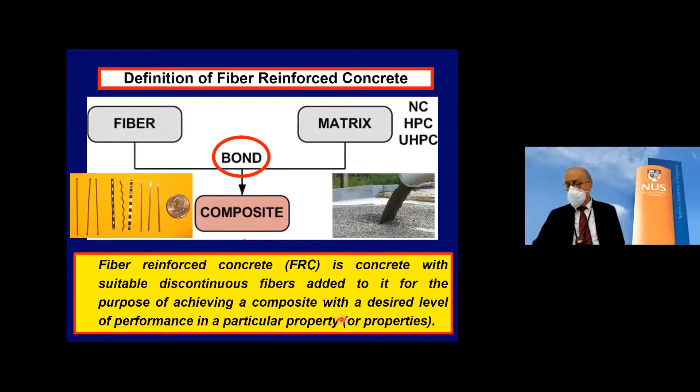So now, essentially, we have the matrix, we have the fiber, the bond between them, the composite. And of course we want to put a fiber for the purpose of achieving a property of interest, for example impact, shear resistance, and so on.

If you are in a civil engineering background looking at courses in concrete structures, we in general look at reinforcement, and today steel and FRP, fiber reinforced polymer reinforcement, are included. The cementitious matrix, the bond between them, the composite.

At this point, you have two paths. One is you go continuous reinforcement - that's reinforced concrete, pre-stressed concrete, partially pre-stressed concrete, textile reinforced concrete, etc. In fact, it started in 1855. The first patent on reinforced concrete is on ferrocement, and it will come up in our discussion.

And then you get all the applications with all these wonderful structural materials. Some of them are standalone, some of them are in combination with others.

We go back to this path where, from a mechanics viewpoint, you would expect that effectively discontinuous fibers are going to be different. They started with a patent in 1874. There was a dormant period, which I'll explain a little bit during the presentation.

Then we started working more scientifically on the subject around 1960. And today we can say that fiber reinforced concrete has some small standalone structural applications, but certainly it could have a lot of applications in combination with other materials.

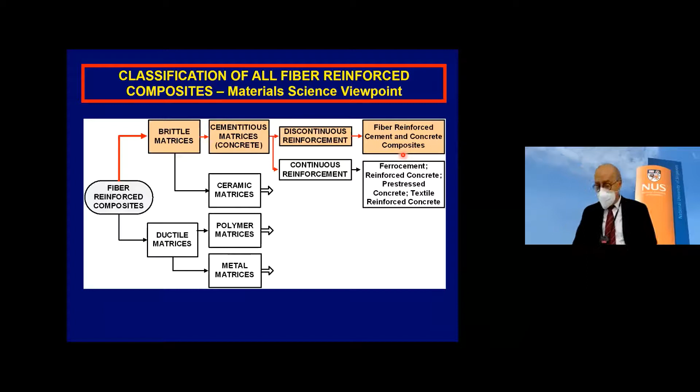So in both cases we are looking at the same material, but whether you go material science or civil engineering, sometimes it seems to fit differently. Same material. So we go back to the outline.

I'll talk about some historical background, and I'm going to identify two periods in the life of fiber reinforced concrete. One I call a dormant period, and I'll try to explain it. The other I call a scientific period, which started in 1963, so when I say five decades of progress, it kind of starts at that point.

I'll talk quickly about development of fibers and matrices, but I want to point out two key milestones: one related to what we call today strain hardening FRC composite, and the other ultra-high performance concrete, or ultra-high performance fiber reinforced concrete. In fact, almost half the lecture will end up with ultra-high performance concrete. Then I'll talk about some applications with UHPC and conclusion, hopefully in time.

Now, starting with some history, you have heard, or I'm sure you have seen, what we call adobe houses or adobe structures made out of mud, clay, and straw. I'm going to show you a picture of a typical village still today where these houses are built of this adobe, and you would wonder why they have put the straw in the mud, in the clay mud.

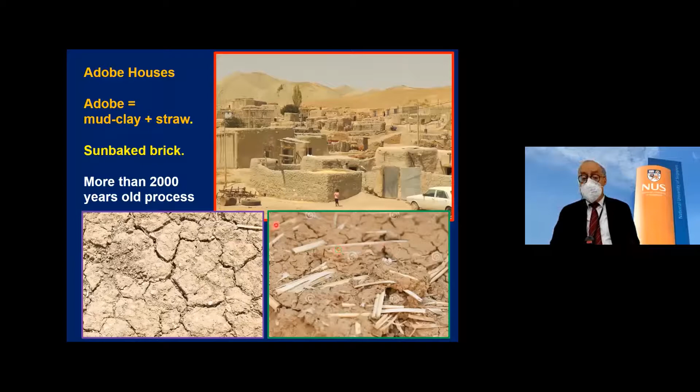So what happened is that the straw is keeping the material from fragmenting or keeping the cracks from opening, because remember, the material is subjected to temperature and environmental conditions—it could be snow, rain and heat. And what seemed to be a great advantage of the straw is that it keeps the material from fragmenting, making it a better material for this construction purpose.

I go back to the fibers in construction material history. We know asbestos fibers were used in ceramics found in Scandinavia, and the assumption—we don't know what ancient people actually thought—was that the fibers stabilized the ceramic when heated to form its final shape. We also know that horsehair was used in mud to produce some bricks-like material.

Cow manure with straw has also been used. So this is the background in terms of materials other than concrete and steel.

The first patent of steel fiber in concrete was taken in the 19th century by a man named Berard from California, surprisingly. What Berard had in mind was to use steel shavings, waste from steel mills, in concrete, and he used concrete blocks. The idea was to strengthen the concrete blocks, and this issue of strength is important.

So let me look at history now, starting with this patent of Berard, 1874. This is my time axis—it's going to span until today.

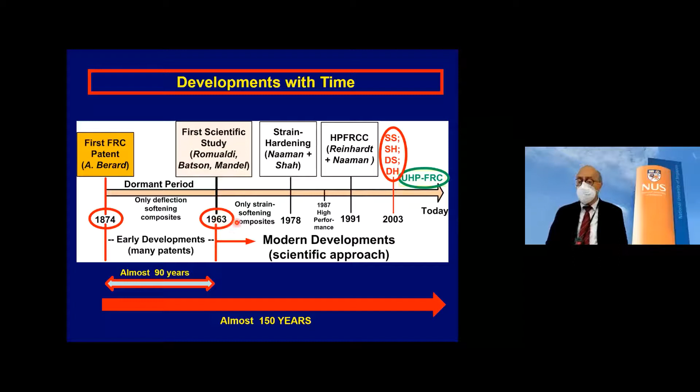Now, along here, I'm going to address one milestone: strain hardening, strain softening material. You may know what it is, but you'll see the background of it. And then I will talk about UHPC, UHP-FRC.

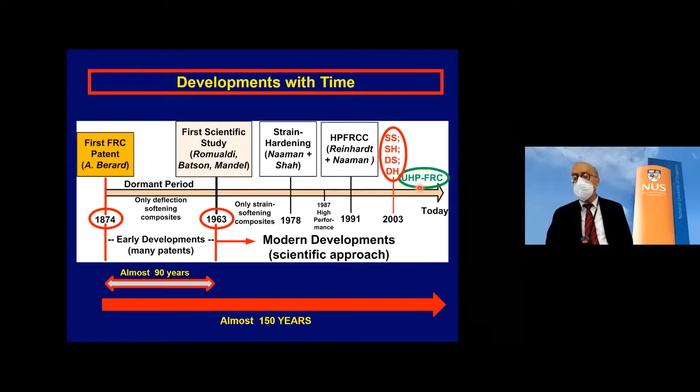It seemed to start around 2003, though it actually started a little earlier, and I'll explain that. All right, so now let's look at that period I call the Dormant Period. It went from the first patent, 1874, to 1963.

I want to show you some patents developed and submitted by many people. This one, for instance, is ferroconcrete construction—they use flat steel fibers, basically cut in short pieces, to strengthen corbels. Even today, if you gave me a fiber like that, I'd say yes, it will do a good function.

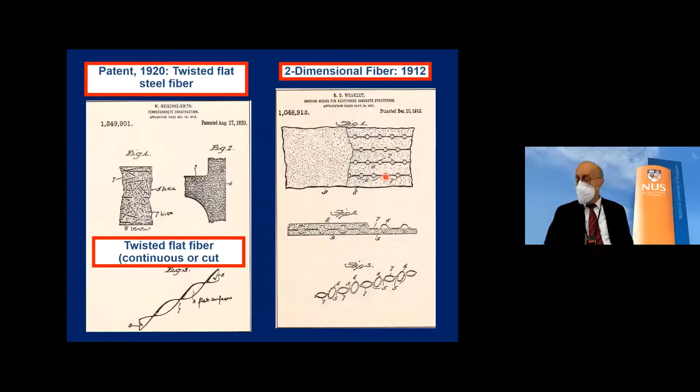In this patent from 1912, the main suggestion was that you needed to create better bond between the reinforcement and the matrix, and these annuli created that bond—the same ideas we have today about how to improve the anchorage of fibers.

I like these two patents very much. 1927, this is a method of producing a pipe. In fact, pipes and poles are a good application for fiber reinforced concrete. Mr. Martin suggested fibers of different lengths, and then crimped fiber.

We know crimped fiber today gives you certainly better bond because of the mechanical anchorage. But this patent could be done today—again, it's called a method of forming a pipe.

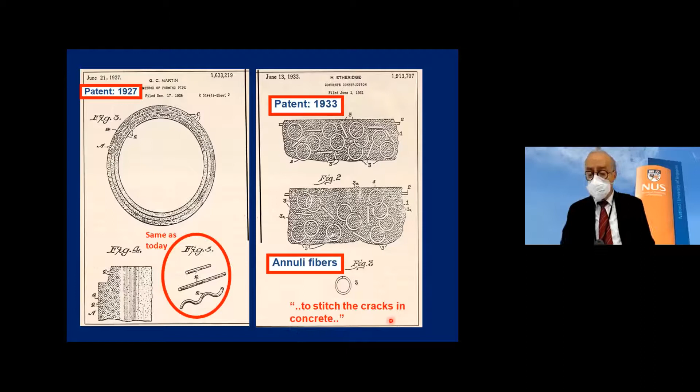In 1933 we have a patent by Etheridge, and I like very much what Etheridge wrote—he wanted to use the fibers to stitch the cracks in concrete. So a crack is going to form, and he wants to stitch the crack, which is again what we try to do today. But I'll explain why they were not successful.

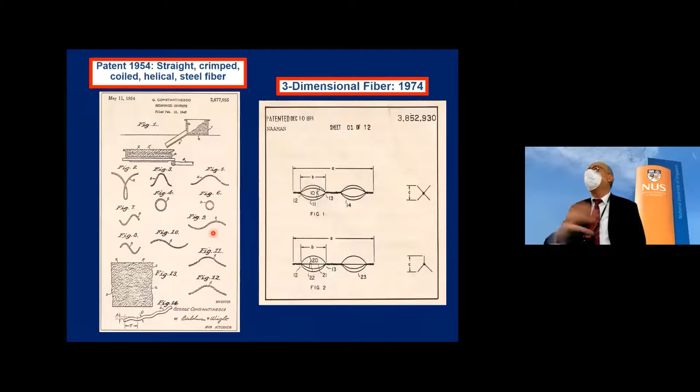Now I have two more patents I'll just show here. One by Mr. Constantinesco—he almost took every single patent that happened before him and claimed it, with the difference that instead of having a straight fiber, he coiled it. So this is a new idea: you coil, you have a third dimension, if you want. I think what he did could be also valid today.

And then you wonder why we haven't heard of him. At some point, I was working as a student at MIT, and we needed to create an anchorage for fibers—it's a long story—and I developed this, almost like a football fiber.

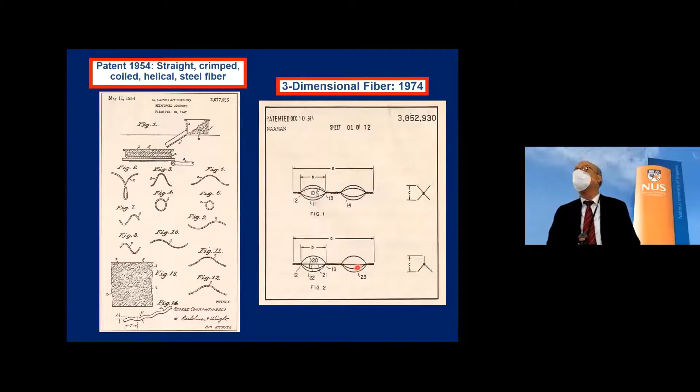Where if you have a crack, most of the time there will be sufficient aggregate. Imagine you go in the middle, and this will anchor on both sides of the crack. This hasn't been used much, but it's there, as I mentioned.

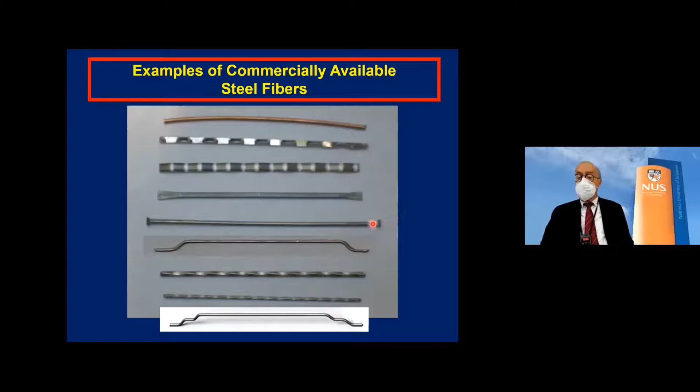Now let's go to more modern fibers. I show you this, although I want to go back and talk about the dormant period, but let's finish this presentation on fibers first. Today's modern fibers could be simply cut from wire, or they could be deformed, indented. They could have paddles at the end, buttons, hooks, twisted, or double hook shapes.

Today, fibers can be steel - I have four of them on the periphery - or maybe carbon, Kevlar, or Spectra. Spectra is a high-density polyethylene; that's the trade name in the US, but elsewhere it could be Dyneema or something similar.

I have also another set of fibers we could use - very modern fibers. I like to call anything below 50 micrometers a microfiber. So I have carbon microfibers, PVA microfibers, and even some steel microfibers in the shape of steel wool, etc. All these are available today if you want to use fibers.

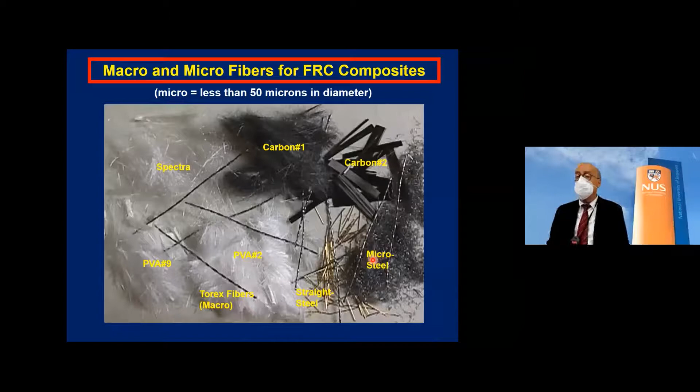This fiber I'm showing is particularly relevant because we're going to talk about ultra high performance concrete. This is the type of fiber currently used mostly in ultra high performance concrete. They have a small diameter, 0.12 to 0.3 millimeters. In producing steel fibers, when you go to a small diameter, it's very expensive because you have to draw the fiber through different dies - it's not like glass fiber, where you let it flow and it becomes smaller and smaller in diameter.

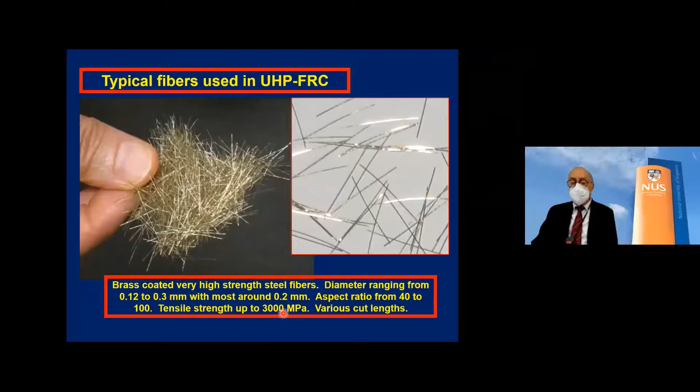So for ultra high performance concrete, we have fibers with relatively small diameter, aspect ratio - that's length over diameter - in the range of 40 to 100, and tensile strength up to 3,000 megapascals. I mention this to make sure that when we talk about fiber in ultra high performance concrete, it's not just a run of the mill fiber that you would use.

Now I go back to that first period, when fibers were introduced and nothing happened for a long time. If you try to look at how long it took, there's something missing - what is the market penetration of different materials that we know today? Take reinforced concrete: 1855 was the first official patent, although ferrocement started in 1849 with Lambot building his boat, but the patent was 1855.

Yet within 20 years we have an aqueduct, Vanne in France. We have several structures along the Suez Canal. We have the lighthouse foundation of the city of Port Said. All these were built in reinforced concrete. So 20 years later, you had quite large structures being built.

Take pre-stressed concrete, the Freyssinet's patent, 1927. Twenty years later, you have bridges built all over France and in Europe. In fact, the first one in the United States was 1949, so that's about 22 years later.

Now we take fiber reinforced concrete, 1874, and almost nine decades until 1960, although we have all these nice patents on the fibers, and we had good concrete because it was used for reinforced concrete and pre-stressed concrete. And yet nothing happened with fiber reinforced concrete.

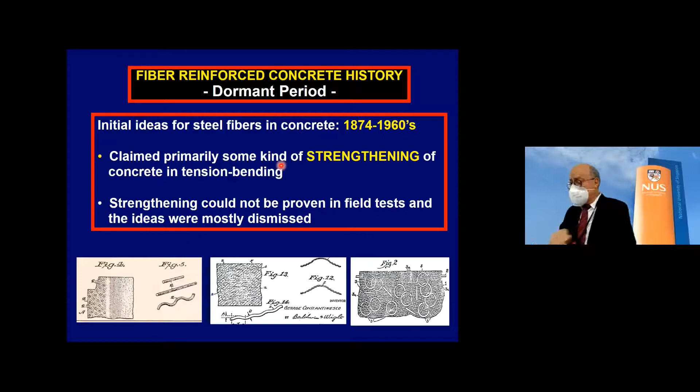Strengthening could not be proven in field tests, and I'll show you the type of field test they did. I didn't have an old photograph, but sometimes what you see is a beam with a number of people standing on top to prove the beam is good. I know there are photos like this, but I couldn't find one for this presentation. I'm showing an example of a beam being tested by the same method they would have used in the 1870s and 1900s, putting the beam and a bunch of sandbags on top until it failed.

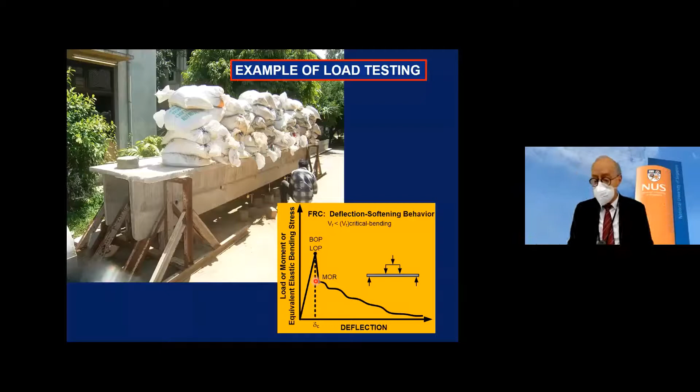We call this method of loading a load-controlled beam, because once you put the load, that's it, the load stays there. What you get is an answer up to a maximum load point, and then the beam supposedly deflects or fails, and you don't get anything else from a load control test. Or what you end up with is your sandbags there. So now let's look at the real method of testing a beam, what we would call today a deflection control test.

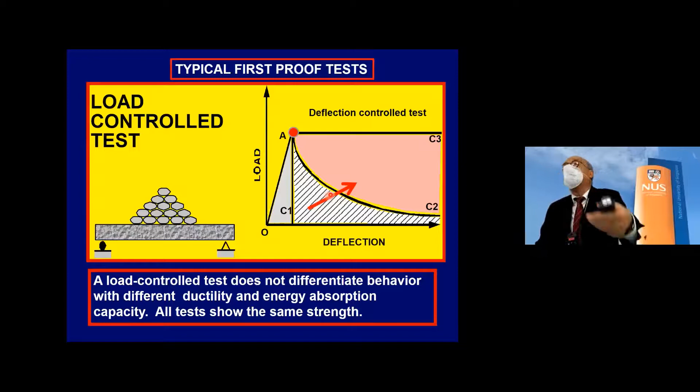Now, when we look at the area under the load deflection curve, we associate that with toughness, energy absorption capacity. So we could really say that the tests run earlier during the life of fiber reinforced concrete did not identify the contribution of the fiber to toughness and ductility, or they were not able to measure it, and as a result, it was in fact deemed a failure.

So the observation is, what happened in the '40s through '60s, suitable fibers were developed and we had okay matrices. Fiber reinforced concrete beams did not meet expectations in terms of strength because they didn't know how to measure energy and toughness, so they said they are not good. The profession did not understand the importance of energy absorption. Once the profession tested with sandbags, they said, okay, it's not good, I'm not interested.

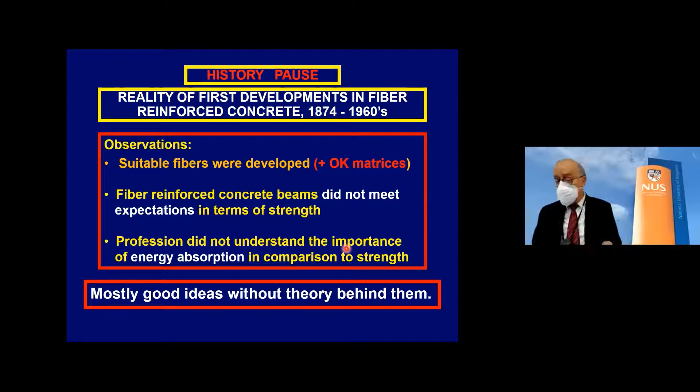So we could also almost say many of the patent holders, those who submitted patents, had good ideas, but there was no theory, no scientific fundamentals behind these ideas. And that might explain why they failed. So now I go back to my time axis here.

In 1963, we had what I call the first scientific method, or the first scientific study on fiber reinforced concrete. By the way, if any of you know of an earlier study specifically on fiber reinforced concrete—a scientific study, not somebody just mixing fiber—please let me know, because I would like to know. But for me, this is it.

So the second period starts here, and I will describe the first paper that triggered this movement. In 1963, Batson and Mandell, who were students at the time (Professor Batson later went on his own), published a paper in which they said that if you put fibers in concrete, the strength of the concrete increases in inverse proportion to the square root of the spacing of the fiber.

Now, let me immediately say, the spacing of the fiber is not difficult to calculate. You could easily calculate the spacing if all the fibers are parallel, or if they are random in plane or random in space—it's done. We know how to calculate the spacing, and they did it, they gave us those numbers. So we have, for example, this is the spacing, and their theory said sigma, the strength of the material, is some kind of constant divided by the square root of the spacing.

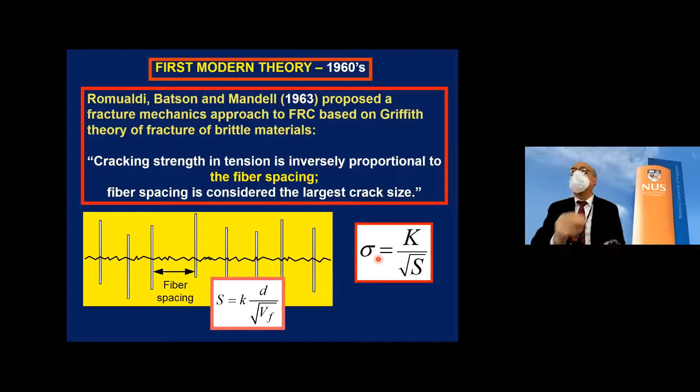So if you today are an engineer looking at this, you would be very excited. You'd say, my God, all I have to do is reduce the spacing, and I get very high strength. Now, first, let's see why they came up with this idea. Remember, in the 1920s, Griffith, a British researcher, introduced the concept of fracture mechanics, and between the 1920s and '60s, that was a very serious concept, followed at many universities.

Maybe you don't remember, but there was at some point the Comet, a jet plane introduced by the British in the 1950s. Two of the planes blew up in midair, and it turned out it was a fracture problem of the glass. So fracture mechanics was very much followed.

And of course, in the case of the fracture mechanics condition that Griffith had developed, the stress at the strength of the material is some kind of constant. This constant is called fracture toughness, mode 1 cracking, whatever. But anyway, some kind of constant divided by the square root of pi times A. Pi is 3.14, A is half the crack size—assuming you have a flaw or crack, half of course. The initial assumption was a penny-shaped crack, but anyway, half the crack length is used in a concrete concept. Effectively, Griffith showed that this relation holds.

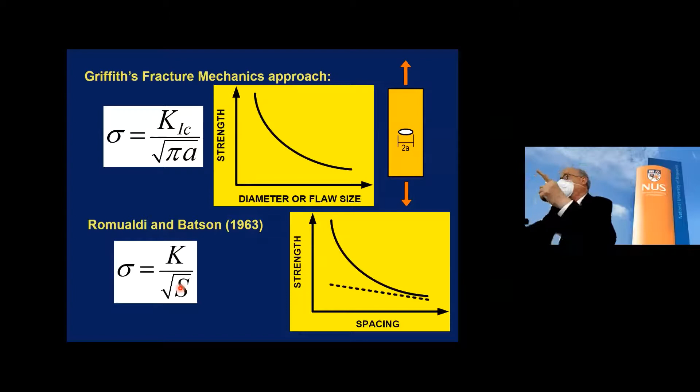So you could say Romualdi and Batson used the same idea. They picked up a constant, and instead of using the crack size, they used the spacing of the fiber. In their mind, the crack goes between one fiber and the other and is arrested there—it's not going to go anywhere. But in fact, we know that's not true. It doesn't get arrested by one fiber, it keeps going. So the initial assumption, if somebody applied their theory, was that the strength would go very high. But in fact, it didn't. I'll show you that in the next slide.

So in the 1960s, if you took this new publication by Dr. Romualdi, applied it to plain concrete, let's say with a strength of 2.1 megapascal, and then added—I can't remember the exact volume—fibers in such a way that the spacing of the fiber is 6 millimeters, it told you your strength in tension increases to 18.7 megapascal. Now, this was very exciting for a lot of researchers, because if we can get concrete at 18.7 megapascal in tension, we can use it without reinforcement—it's a structural material.

So, however, the first scientific studies—as soon as Romualdi published the paper there was a lot of excitement, and in fact he got a patent, he got several research projects from the Department of Defense and other departments. And then there was a publication, the first publication, by Professor Shah and his student, and they tried to verify the theory. Their data showed that yeah, you could decrease the spacing, but the strength doesn't increase very much. It increases a little bit, but nothing according to this.

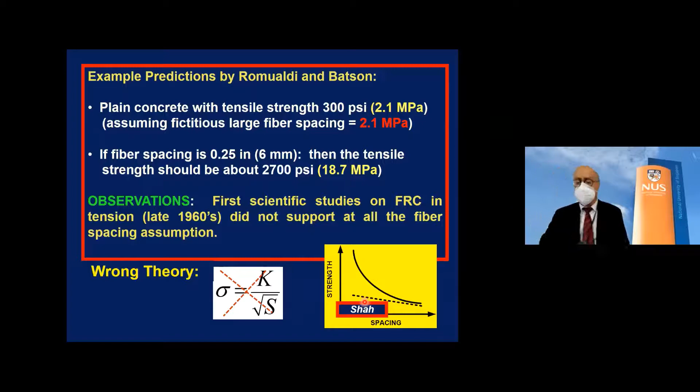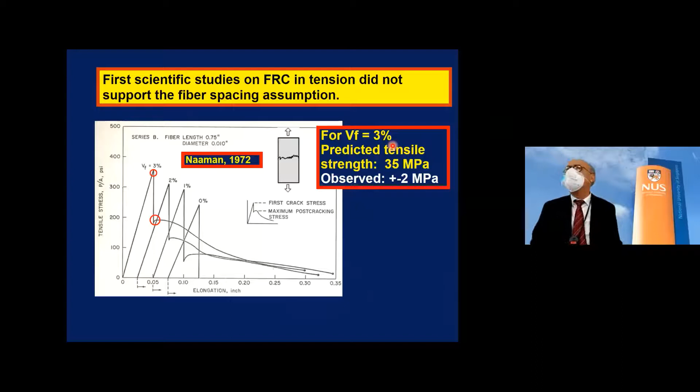In fact, my own work, which started at MIT in '69—my thesis was on a statistical theory of strength of fiber reinforced concrete. I can tell you at the time it was too futuristic. When my advisor told me, 'You're going to work on fiber reinforced concrete,' I said, 'Why? I'm interested in pre-stressed concrete—why would I go cut the wire, cut the fiber?' But anyway, he was paying for my studies, so I did.

So I ran quite a large number of tensile tests, direct tensile tests. At the time, even using an Instron universal testing machine, we would use the machine to get load and displacement, but the displacement was between the platens, not like an LVDT taking exact strain. And you could then understand what the shape of these curves are.

Typically what I observed, and 3% fiber is about as much as I could put in from the fibers I had, was something like this: the load increases up to a certain point, there is a crack that happens—I call this the cracking strength. Then it decreases up to this point, and then continues decreasing in a softening way. Along this part, the fibers pull out. I call this the maximum post-cracking strength, and this is the cracking strength.

I observe here, if you look at PSI, about 2 megapascal, maybe 3 megapascal. But the theory of Romualdi would have given me 35 megapascal according to my numbers. So obviously this was not correct.

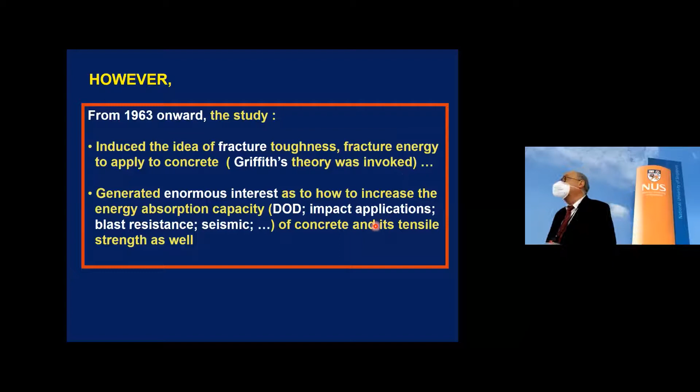But because the idea of fracture toughness was introduced, due to the interest of the scientific community in getting a material that can achieve more fracture energy, it generated a lot of interest. I explained that when I was a student at MIT, my professor could pay for me to do the research. It came from somewhere, and particularly, as I mentioned, the Department of Defense was interested in defensive structures, impact resistant structures.

At that time, we also started working on seismic resistant structures. Anybody who needed a structure that can absorb energy was immediately interested in fiber reinforced concrete. Even today, if you give me an assignment to work on the tension of fiber reinforced concrete, or on the fracture, during that study I will learn more about tension, compression, shear, whatever, because that's part of the study.

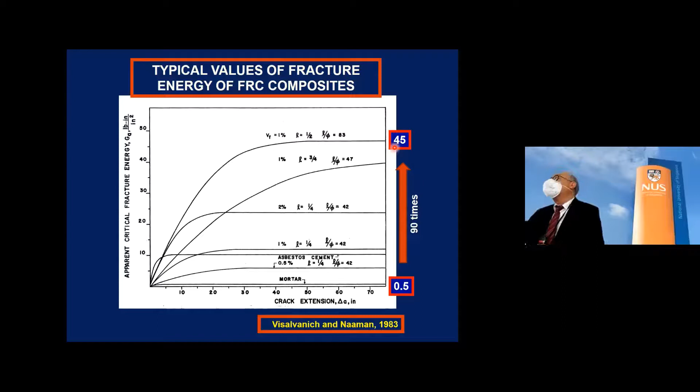So in a way, by putting 1% steel fibers, I'm observing 90 times the energy, not 90%, 90 times the energy absorption capacity, or if you want, 90 times the surface energy of the material. Today we can do 1,000 times, and we did it with Sifcon and some other materials. So it's not anymore that the energy is a little thing. The fracture energy, or the toughness of the material, became the real key parameter, the most important parameter. And it has to be so.

So I stop here in a history pause. While we were evaluating the fracture energy of FRC composites using scientific method, we also worked simultaneously on the mechanics of the composite, fracture mechanics, strength, post-cracking strength, etc.

So the pioneering idea was to increase tensile strength, now understood after initial cracking. The idea in the first pioneering work simply looked at the cracking strength, and that didn't change very much when you put 0.5% fiber, or 2%, or 1% fiber. But after initial cracking, that was the key. They didn't understand it, but now we understand it.

And so after this initial cracking, we get something I call the maximum post-cracking stress in a tensile test, or the modulus of rupture in a bending test. That became understood, and it's the best part. Now, today, when I want to characterize fiber reinforced concrete in general from a performance viewpoint, I can say it is strain softening or strain hardening.

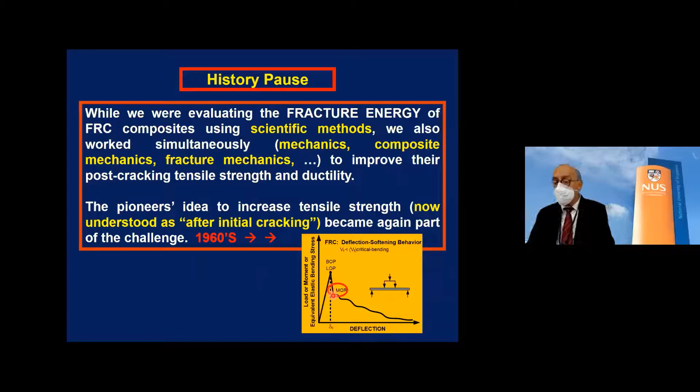Now, strain softening is a little bit like this curve here. This is deflection softening, but in a way, after cracking, the load drops and it never picks up more than the cracking load. So I show here today the definition of strain softening response: you reach the point at which you have a crack, the load drops, maybe it increases this way or that way, but in any case, the maximum post-cracking stress is always less than the cracking stress.

So this is a definition that in fact started only 20 years ago, 15 years ago. Before that, we didn't have it, but I'll show you why we had this issue. Between 1963 and 1978, if you reviewed all the possible publications on the tensile response of fiber reinforced concrete, you will find what we call today strain softening behavior.

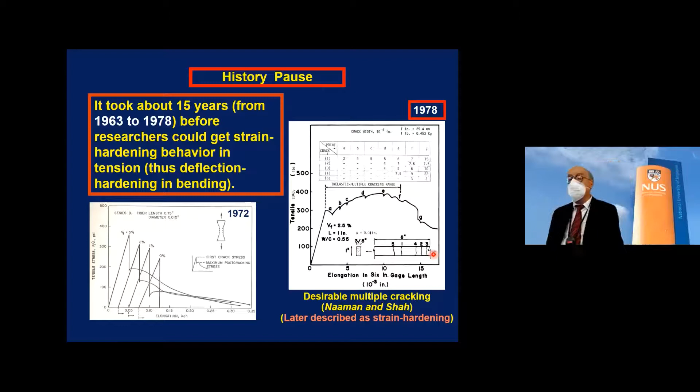In 1978, in collaboration with Professor Shah, we published a paper at an international symposium in the UK, organized by RILEM. This was effectively the first time we had tested a tensile specimen of fiber reinforced concrete in tension. We observed several cracks, and we observed this load maximum after cracking larger than the load at cracking. We were even so interested that we measured somehow the width of each crack and the order in which they came.

At the time, we looked at this and I said, this is great. We called it desirable multiple cracking behavior. We didn't call it strain hardening, as we would later. But we tried something, and later on, today, using all our knowledge, we call this behavior strain hardening behavior.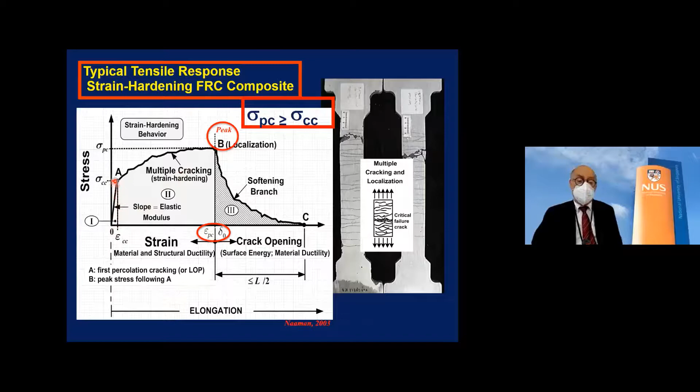It means after initial cracking, which I call percolation cracking - meaning a crack goes all the way through the specimen - there is a hardening region where the stress increases above the cracking stress. Multiple cracks occur up to a maximum point called the peak load. At this point there is localization, meaning one of the cracks becomes weaker, like a chain where one link starts opening. The specimen response then softens over what we call a softening branch, accompanied by fibers pulling out, fiber failures, or a combination of both.

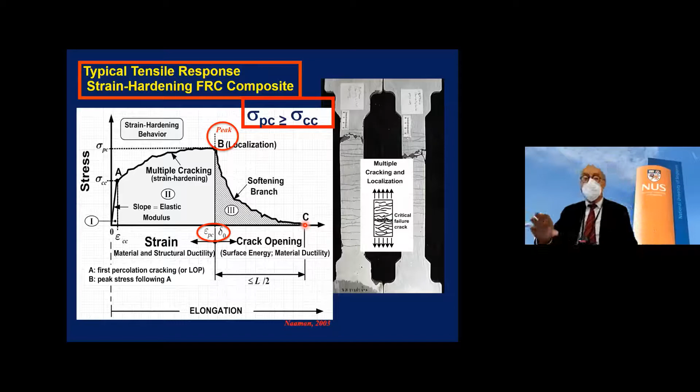Today this is understood as strain hardening behavior, but at the time we really didn't know. We called it desirable multiple cracking.

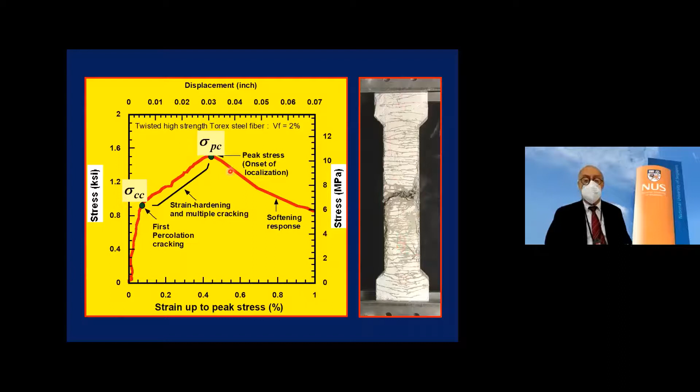Again, today this is an example of a strain hardening response. You could see clearly the first cracking, then maximum post-cracking stress. The specimen has been sprayed here with alcohol so we can take a good picture of where the cracks are - 10 megapascals in direct tension with sufficient ductility is a very, very good response. But this is a real specimen.

Now let's go back to our time axis, between 1963 and 2003. In 1987 I was working on SIFCON for several years, and I was observing strain hardening behavior. It was beautiful - 1% to 2% strain at maximum stress. I presented a paper and decided to call this high performance. Remember, this is 1987.

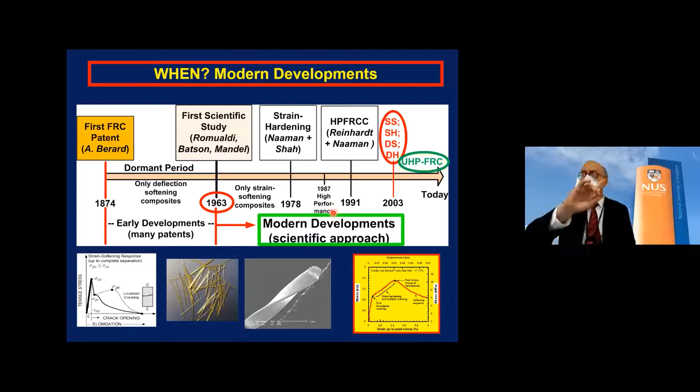Later, with Professor Reinhardt, we organized six international workshops, eventually every three years, on high performance fiber reinforced cement composites. In our mind this is what we call today strain hardening, but at the time we didn't have that clear definition. To make the story short, at the fourth workshop, at the end, we all assembled together and decided that all fiber reinforced cement composites must be classified according to their tensile response - either strain softening or strain hardening.

No need to go into detail - this is a performance specification. You could do it using PVA fiber, steel fiber, or whatever. You don't need to create a name like SIFCON or ECC for your development; just call it strain hardening, give the information, or strain softening. So notice it took 40 years - this is a scientific community, 1963 to 2003, to come up with this definition.

As a result, we also had deflection softening and deflection hardening - it follows from tension softening to deflection and so on. The sketch for it is shown here. All FRC composites are strain hardening or strain softening. Some strain softening can give you deflection hardening, and all strain softening... you get deflection softening. This is a visual of tension and bending.

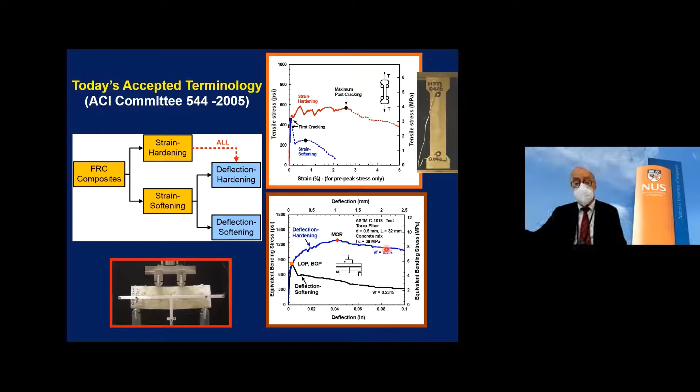You would agree with me - let's look at deflection, because this is a common application, a small beam, a small slab. You would agree that if you have a response like this for a given construction material, you could use it for some structural application, because you could use your service condition here. You have maybe a factor of 2 for the ultimate. The ultimate is not brittle - you have a descending branch that gives you warning. So it is a structural material I can use, but it has to be deflection hardening, not softening, or strain hardening, not softening.

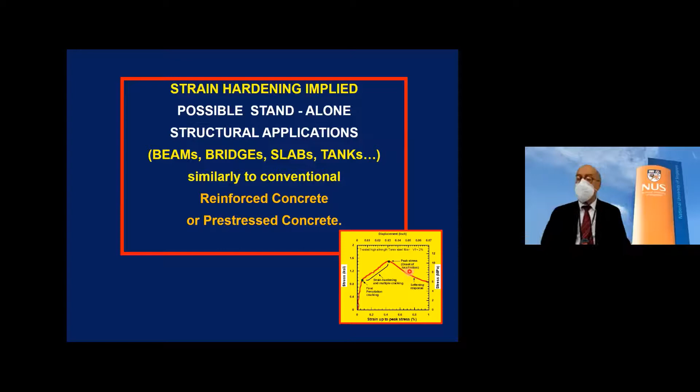So what I could say today is that strain hardening implies possible standalone structural applications - beams, bridges, slabs, tanks - similar to conventional reinforced concrete or pre-stressed concrete. Of course maybe not the same load capacity, but in a similar way on a different scale. This little example shows that if I look at it without a scale, I'd say this is a perfectly good structural material that I can use.

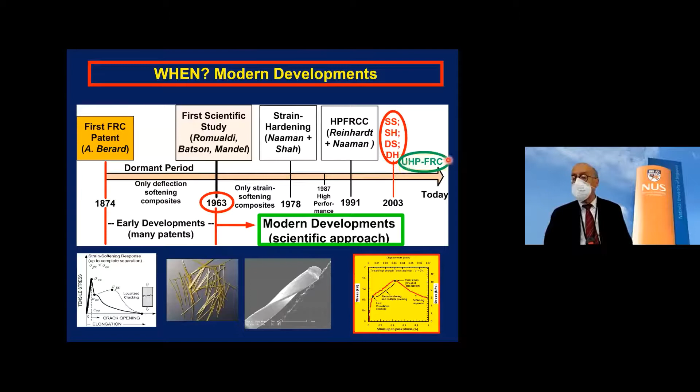Okay, so now I'm switching to the case of UHPC, UHP-FRC. Looking at the chart again, this is my time chart - we started with strain softening, we ended up with strain hardening. UHPC started - I'll show you a bit earlier - but the serious UHPC really started about early 2000. By nature we are all competitive, like the Olympics every few years, but even in technology we like to always get higher strength, higher ductility, higher toughness, etc. Today in the field of fiber reinforced concrete it's UHPC - ultra high performance concrete, or UHP-FRC, ultra high performance fiber reinforced concrete. In fact, there is the same.

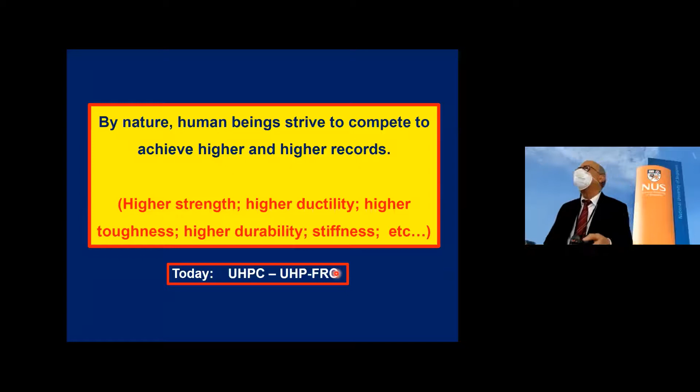You cannot use UHPC without the fibers, and I'll explain that a little bit when we talk about the definition. So the outline of this part: I'll define UHPC and its history, give an example of the challenges we faced at the University of Michigan developing our own successful mixture, then a conclusion, and a few examples of application to give you an idea what's going on at this time.

The first definition, although UHPC existed before 2008, was attempted by Dr. Rossi from France in one of his papers. He wrote: UHPC uses a relatively high binder ratio, a water to binder ratio less than about 0.2, and shows a compressive strength in excess of 150 megapascal.

Let me explain each one. High binder ratio - the binder is essentially your cement, but if you're using silica fume or other cementitious additives, that's also binder. When you say high binder ratio, you could translate that to high cement content compared to the aggregate, so it's all by ratio.

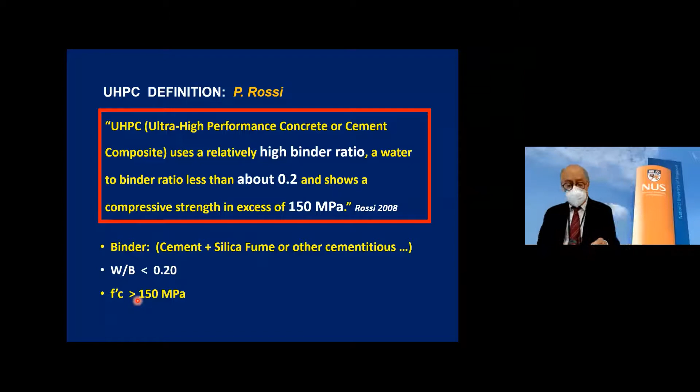And then the last item, the compressive strength more than 150 megapascal. So we had at least one definition, and I like it because at least somebody stood and said this is what it is. Now, 10 years later, ACI Committee 239 came up with a definition. Let me read it.

Ultra high performance concrete is a concrete that has a minimum specified compressive strength of 150 megapascal, with specified durability, specified tensile ductility, and specified toughness requirements. These are all specified - it's like a performance requirement. Fibers are generally included to achieve these specified requirements. So in a way, they made it one single requirement, 150 megapascal, but all the rest is a performance requirement specified by you.

And the specification could be - if I was specifying, I would specify at least a strain hardening material. I want that. It could be deflection hardening. I may specify some durability or fracture toughness, whatever.

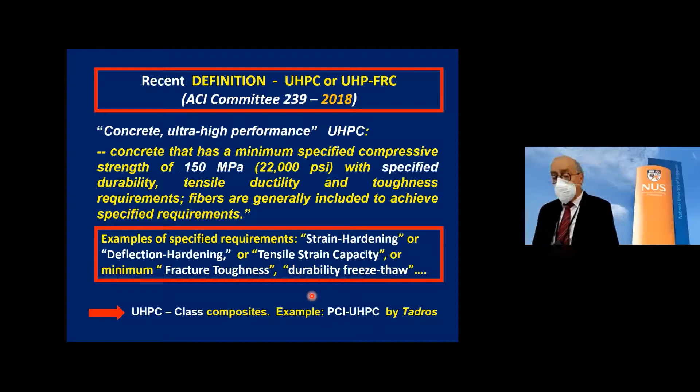The difficulty here is that when this ACI committee - and I was on the committee trying to define UHPC - I was of the opinion let's define UHPC and then UHP-FRC separately. But they thought you cannot use UHPC without putting in the fiber; people are going to get confused, let's put them together, and it's okay. So sometimes in my own work, when I want to make sure, if I'm putting fiber I say UHP-FRC, that's what I mean. But anyway, what's important here is ACI kept it up to the user to specify the requirement, unlike the case of Rossi.

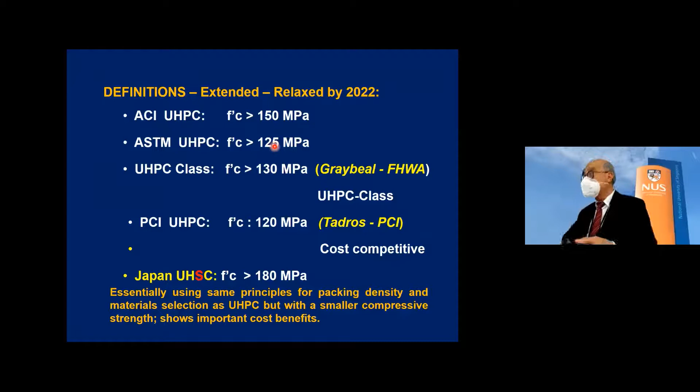Now, I would like to immediately say that the ACI definition was from 2018. By 2022, we have had some relaxation, I would say, of some of these requirements. First, ASTM, in one of its recent standards - I can't remember the number - specified that UHPC should be more than 125 megapascal. So that's a little bit of relaxation here with respect to 150.

Dr. Graybeal - if you are doing research on UHPC, probably you have seen some of his papers - works at FHWA in the US. In his own tests, although he followed the 150 megapascal standard, sometimes you run a test and get less. What do you call that? So he said, I'm going to call that UHPC class material. Basically we used the same component, the same material, but we weren't lucky to get 150, we got 130.

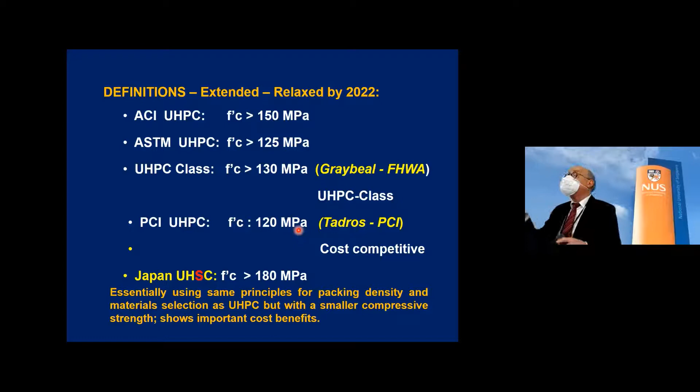More boldly, recently, Professor Tadros - a good friend of mine - was commissioned for a large project by the Precast Prestressed Concrete Institute. His report was published in December; at some point, if you are interested, you might be able to get it from PCI or from him. From the beginning, he decided they are going to - he's working now on a precast prestressed application.

From the beginning, talking to many people in the precast industry, they targeted 120 megapascal for two reasons. One, we don't need more. Two, it costs less, and cost was very important.

So now what we have, from Professor Tadros' study, is a UHPC with a given proportion guaranteed to give 120 megapascal. He gives the design recommendations: what to use in beam design, what modulus of rupture to expect, what ductility to expect, and so on. He designed several structures, and it was a relatively large money project for a research study.

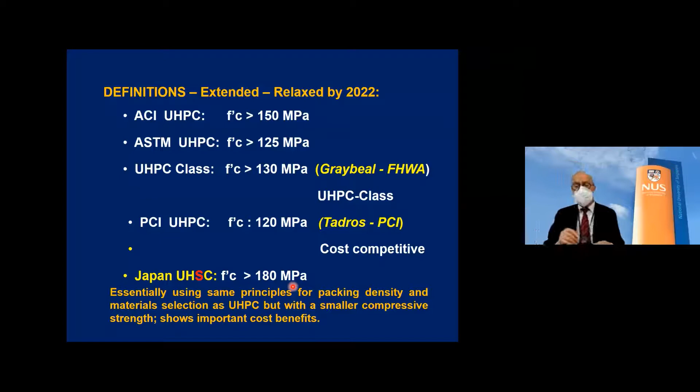In Japan, they still use the term UHSC, ultra high strength concrete, and it's 180 megapascal. But for us, if you have a test and you targeted 150 but you get 145, don't panic, call it UHPC class, and you are in good shape.

This is an example of an actual UHPC stress strain curve from a recent study by Abrishambaf and a colleague. I was interested in studying the strain capacity of this material, and you could see it's just beautiful. The fibers have been oriented, giving a beautiful stress and strain response, strain hardening, and reasonable strain capacity at the maximum.

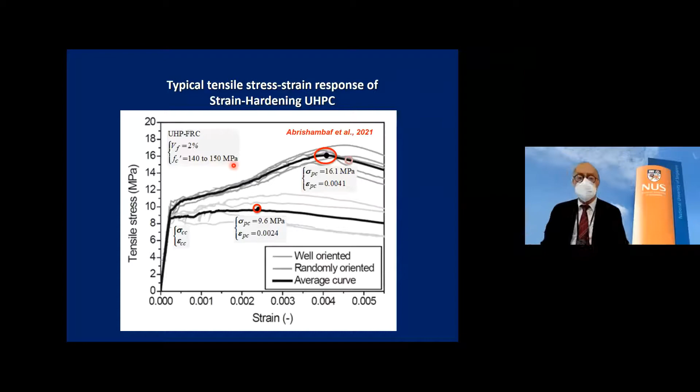So it's just 2% steel fibers, with strength 140 to 150 megapascal. It satisfies the requirement - it is UHPC.

In 1981, a study by Birchall et al. came out from the UK on what they called macro defect free cement. We were excited, until we found out they claimed 200 megapascal, but they used polymer in addition to the cement, along with other curing and heating procedures. So it was a very specified special product, but not completely cement - if half of it is polymer, it's not exactly cement.

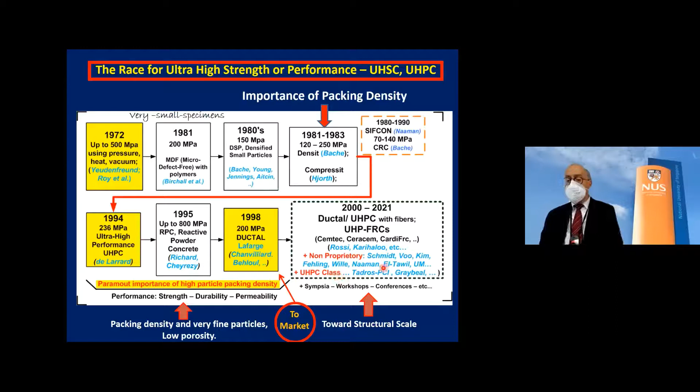Remember, Ductal was proprietary - you didn't know what's inside, you just bought it. Here, a lot of non-proprietary mixtures emerged, and I give some names: Professor Schmidt from Germany, Dr. Voo who is in Malaysia - I'll mention him later - Dr. Kim from Korea, Fehling in Germany, my student Wille in the United States, Naaman, myself, my colleague Tadros whom I just mentioned, and Graybeal. All of these people worked on new mixtures and published them.

So, if you follow these mixtures, you do it. But again, I go back here to the importance of particle density or packing density and how fine particle packings are used. So now I'm going to show you a little bit about what comes next.

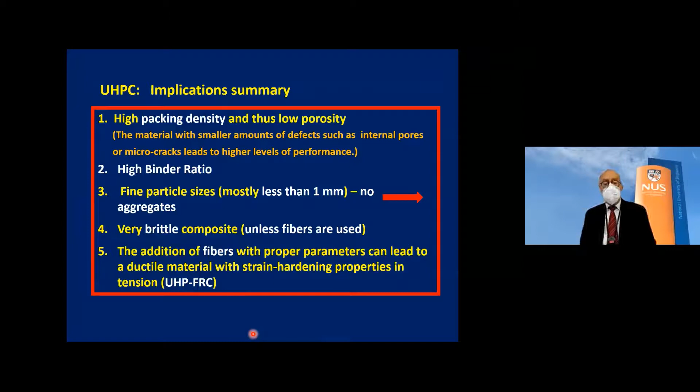I'm going to talk about particle packing, but the rest is kind of what we already talked about. Let me skip this. Now, starting in the year 2000, armed with the new studies that I was reading from Lafarge, etc., just give me time.

I decided to start working with my student on ultra high performance concrete, and we ran a very systematic evaluation, studying seven different types of cement, five sources of superplasticizer, five sources of silica fume, and so on—thousands of tests. It took us about three, four, five years before we started getting some interesting results. The study took about 10 years total, and at the end we had some very nice results.

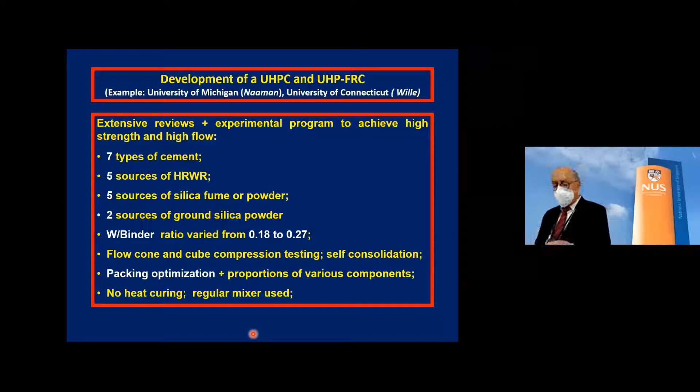I want to mention something that we don't think about, and that's packing density optimization. If you haven't done it before, this is visual and you might like it. When you put spheres of equal diameter in a container, their packing density turns out to be about 60%—that is, the volume of the spheres inside the volume of the container is 60%.

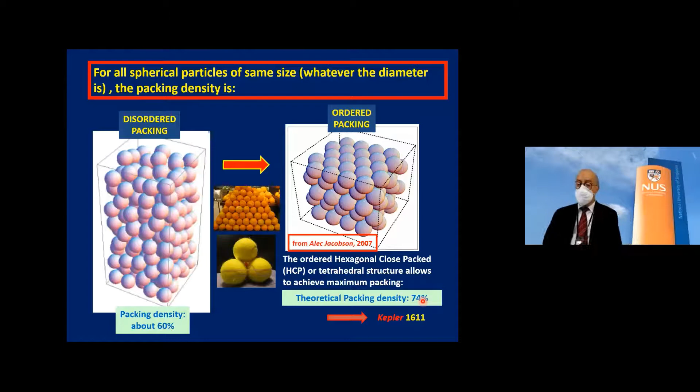However, if you organize these spheres in a pyramidal form, called an ordered hexagonal close-pack structure, then you get 74%. This particular result was already obtained by a mathematician named Kepler in 1611. He gave the formula: the packing density of an ordered structure, the way I showed it, is pi over the square root of 18, and that's 74%.

Not only that, he then calculated the diameter of the little spheres that you could fit in the interstitial space between the bigger spheres, calculated their volume, and found that if you put them all in these spaces, you get 1.7% more—so you go from 74% to 75.7%. That's not much.

But that tells you that if you want to increase the packing density, you better think hard about it. So now I go to this study, which was carried out by Yamada, I guess—can't remember—maybe 2005 or something like that.

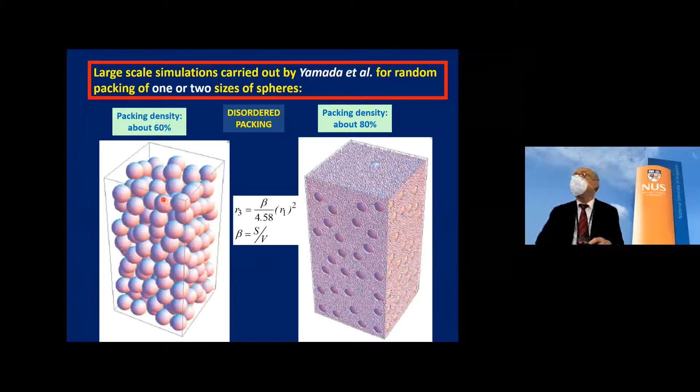In his study, he imagined that these big spheres are red blood cells, and he wanted to add to them small particles of medication. He ran a very large number of simulations, and was able to get the radius or diameter of the particle he needed to add to these spheres to get the highest possible packing density.

So I took this, and calculated, for an example taking a column of 300 millimeters, I took the diameter of the big sphere here as 0.5 millimeters, and I got D3 as 1.1 micron—very small, but by using this, I might be able to increase the packing density to 80%.

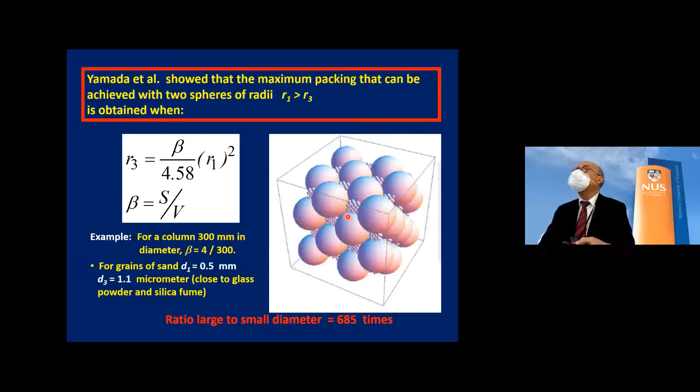So this is typically what we selected for our mixture. This is the size—here 1 millimeter, or 1,000 micron. In our study at the University of Michigan, we selected D1 as 0.5 millimeter, D2 calculated by Kepler's formula, D3 calculated by Yamada's formula, and we didn't have to use D4. D5 was nanomaterial, so we didn't use that. Eventually we used three different diameters of particle.

This is our sand 1, this is our sand 2, cement and silica fume were able to produce the D3, and glass powder the D3 as well. Now the green things here, I put them in—we didn't use them—but to show that if we needed different diameters, we could have managed that as well.

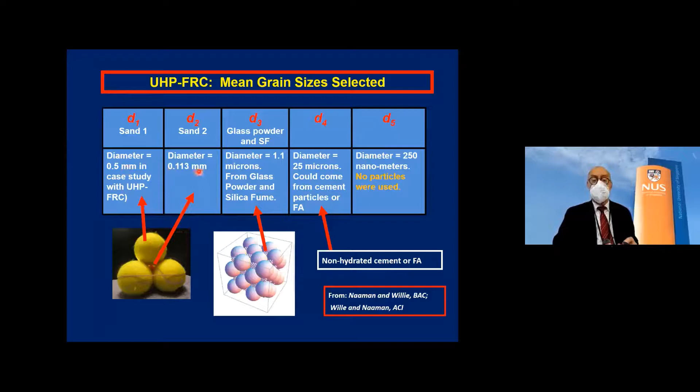Now, this is visually—some of these—the big sphere here is our 0.5 millimeter sand. The one inside is the 0.11 millimeter. The very, very small one is the 1.1 micron. And then we counted that there might be some non-hydrated cement that can occupy the 25 micron range. This was a nanoparticle we didn't use.

But one thing, again visual, is that—remember I said if you add the small spheres to the big spheres, in this case you add only 1.7%. But if you tried an experiment, like 95% beans and 5% lentils, and you shake them together, you find that the lentils go down to the bottom—they don't go into the interstitial space. So what you have to do is something more.

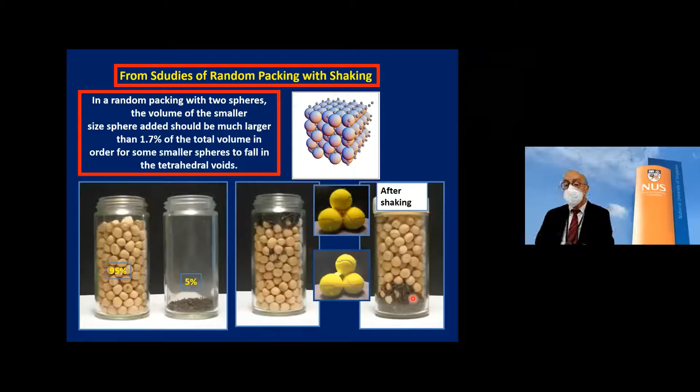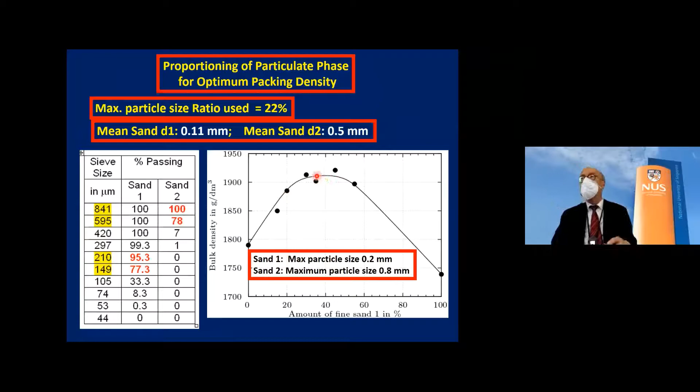And one more thing: that something more is that you will pick two sands, for example sand 1 and sand 2, and you find out that each one may have a bulk density—let's say they call it small—but when you mix them together, there is a proportion that is going to give you the highest bulk density. So we needed to pay attention to that in our calculation.

The other thing that we did that was, I think, a little bit innovative is that we selected the sand that went in here and gave it a little bit of a bigger range.

We wanted some particle to be large enough to create an instability so that the grains roll more easily. I think we cannot prove it, but I think it helped.

I'm going to go quickly here because time is running out. This is the mixture and so on, I don't want to exceed my time.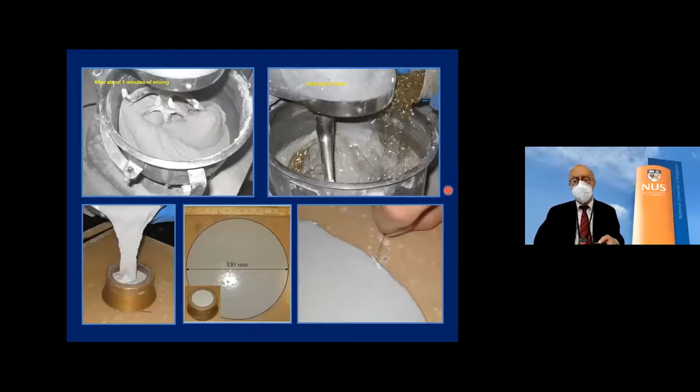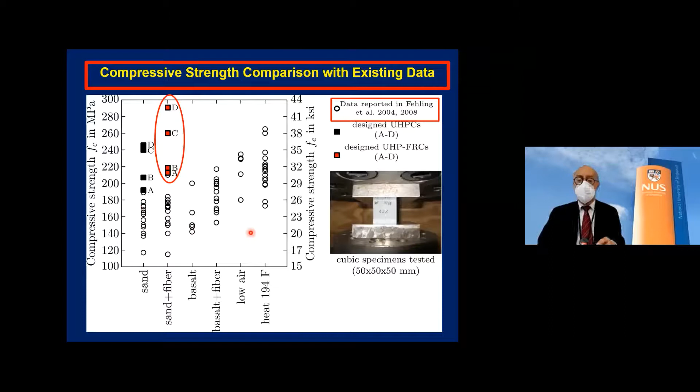This gives you an idea of the mixture we developed: 192 megapascal without fiber, 210 megapascal with fibers, and a spread from the inverted cone test, which measures the flowability of ultra high performance concrete. Our results were in the range, in fact higher, than what was published by Professor Fehling for a very large number of data, so we were very confident we had a good mixture.

I know I'm running out of time, but there's a part I want to cover. Give me some advice, Professor Quirk. I have still some applications, this might take 2-3 minutes more. Okay, 3 minutes total? All right.

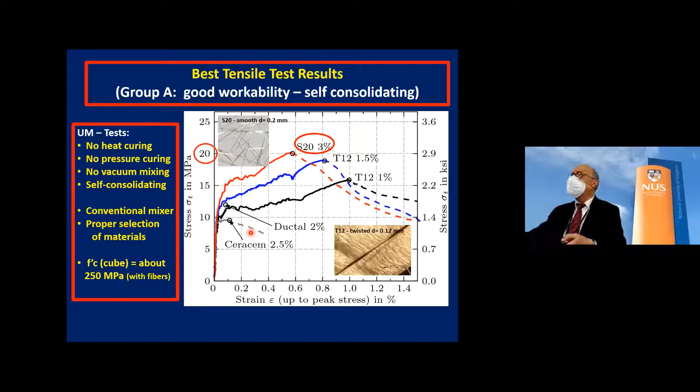I'm not going to give you the detailed results, that doesn't matter - the detailed results exist in the publication and the book. I'm going to go through the results slowly.

One conclusion is that these non-proprietary UHPC mixtures developed can be made at a fraction of the cost of the mixture you could buy, and therefore you should use them. Hopefully this race of going to higher strength, higher performance will continue, and you'll be part of it.

Now I want to show you some structural applications with UHPC. The first one is very important - there's a study done by Professor El-Tawil. He took a pre-stressed concrete bridge beam, a standard pre-stressed concrete design, and redesigned it using UHPC.

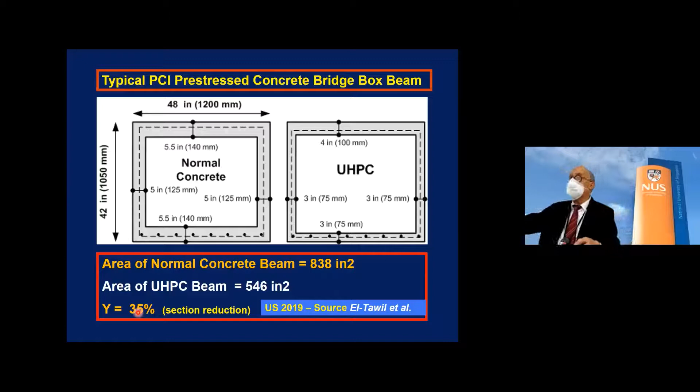The first observation is the cross section is reduced, a 35% reduction. Because the cross section is reduced, the weight is much less. Then you save on steel, on transportation cost, on erection cost, etc. Now let's look at the calculation he made.

He took that beam and said the cost of the concrete is X, $120. Total other costs - transportation, erection, steel, etc. - 7X. Total cost of the standard beam, 8X. But when he took the UHPC beam with a 35% reduction in weight and a 30% reduction in other costs, he got a total cost of 8.8X.

The difference in cost is not so much. If you can get a material that can last for 100 years without maintenance, it's nothing to pay 0.8 more for that. So that's the first important thing.

Today, if you can develop a non-proprietary UHPC material that costs essentially 1/3 or 1/4 of the one you buy on the market, you should use it, because you could do this kind of comparison to check exactly what you get, and the increase in service life should be considered.

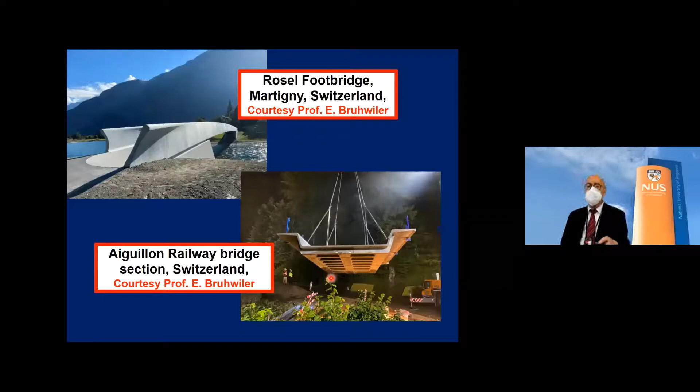I'm going to go through 3-4 of these slides. Most of the initial applications of UHPC were on footbridges - we were still timid, we didn't know what to do. I'll show you 2 bridges built in Switzerland by Professor Bruhwiler.

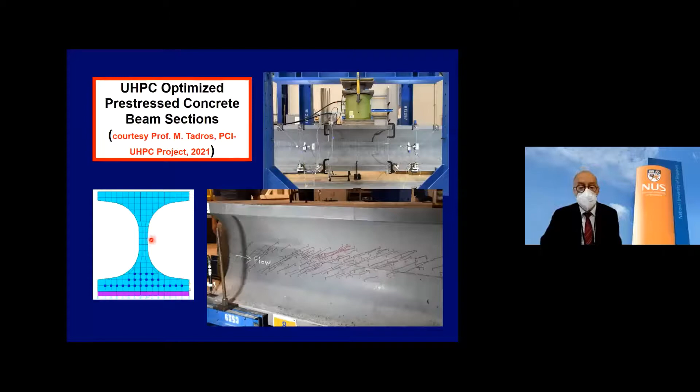This is the study I mentioned by Professor Tadros, where they developed their own UHPC. I'd like you to notice the width here is between 75 and 100 millimeters - these are real size beams. In fact, he tested beams without stirrups in the middle and still got a factor of safety of 2. This is the one I want to stop at because it's amazing.

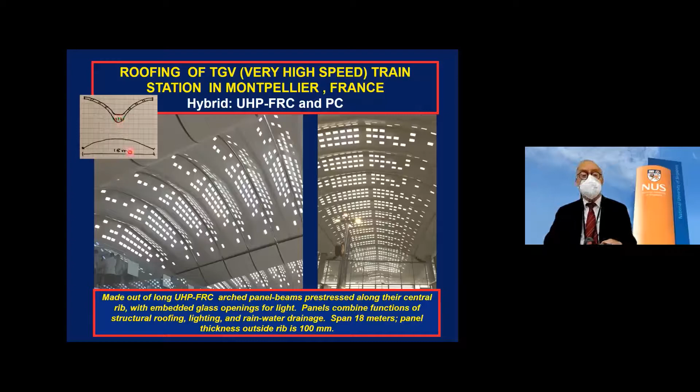This here is only 100 millimeter thick UHPC. The lights are integrated glass inside. And the shape of this structure has been designed in such a way, because it's round here and here, that it collects the water. The drainage, the water that comes to the roof, is automatically drained around. So by building one roof with light integrated from the outside, no maintenance hopefully for the next 100 years, and taking care of the drainage, they said it cost them less than if they had built by other methods.

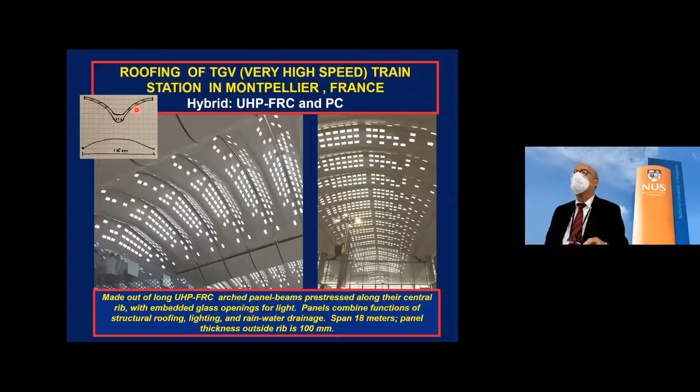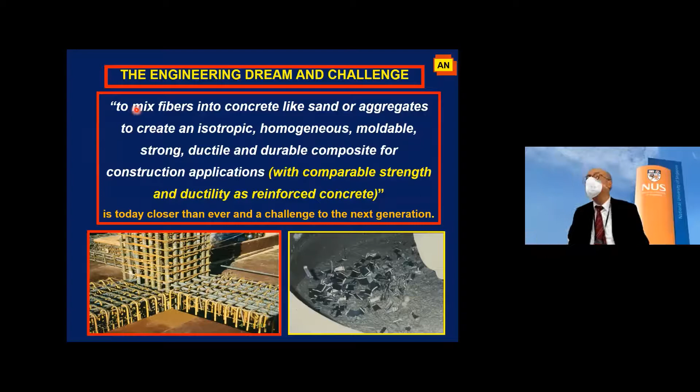Our dream is always to mix fibers into concrete like sand and aggregate, to create an isotropic, homogeneous, moldable, strong, ductile, and durable composite for construction applications. Almost similar to reinforced concrete. And I think that dream is getting closer, and you guys are going to be in it in the future. Thank you very much for your attention.